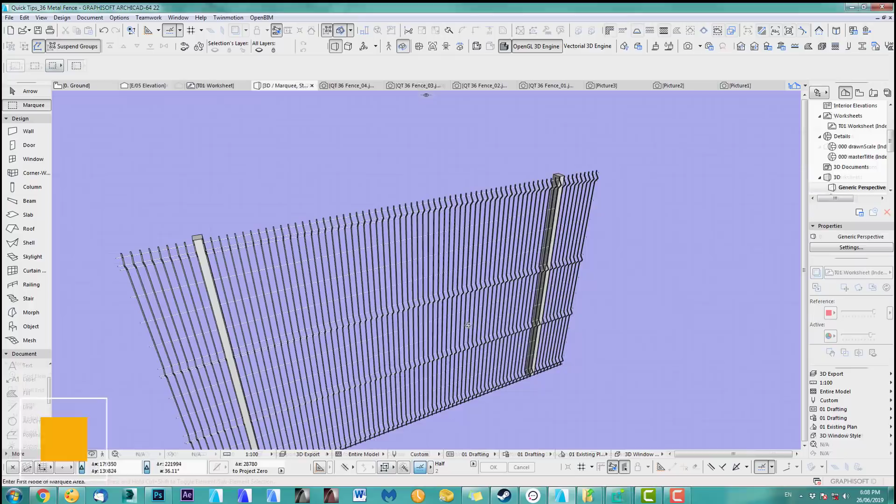I got this idea for this quick tip tutorial from one of my subscribers, Mark Simons. He asked me how to create some sort of wire fence, so I thought this would be a good quick tutorial. Let's get into it.

He had a fence on a PDF, so I moved it in here. Actually, I want to move it into my worksheet. This is my worksheet, it's empty, so I just move the PDF in here. You click outside and it will place it.

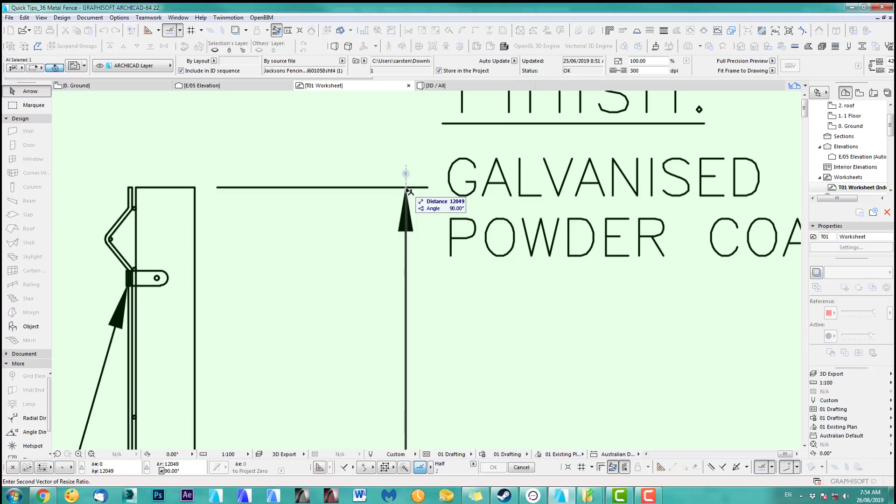Before I continue, I have to resize this. You click on the PDF and you can see it's 2410. So you go and resize, define graphically, to make it more exact. You go there and move all the way up here, use a shift key if you need to. Click again and put in 2410, enter. So this is nicely scaled down now.

Now the next bit is the exciting bit, which I didn't even know. I've used ARCHICAD so long and I can't believe I didn't know this. I saw this on a user group Facebook group a couple of days ago, and I need to try something.

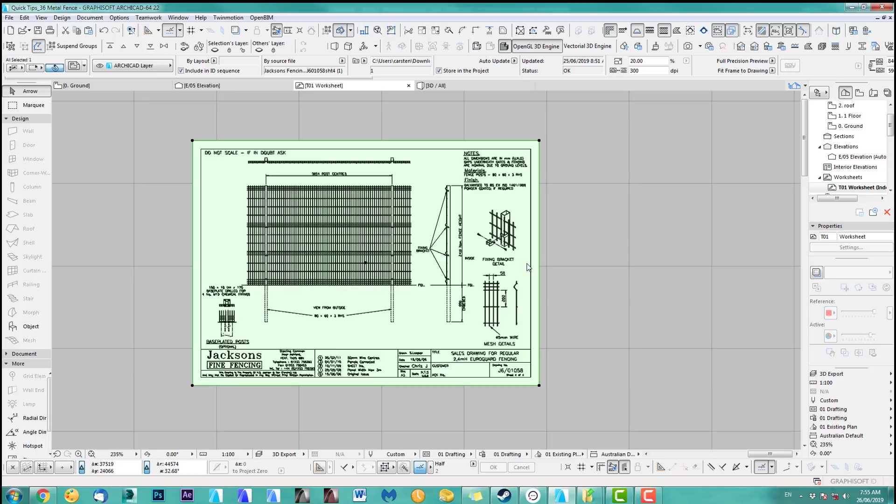So now you can actually select this PDF. You go to reshape and explode into current view. You get all those options here. I'll leave them at the default settings, but you can play around with it. And I click OK, and have a look what it did. So I can move the PDF away.

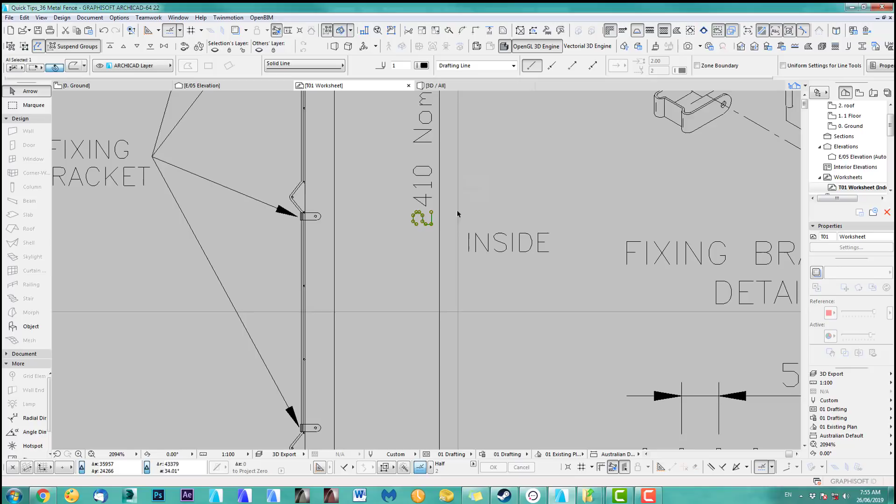And voila, look at this. I got everything grouped and their lines. Let's just suspend groups and see what we got. You got numbers there, you got lines, got some arrows. This is really good. It's a bit of a shame - I was hoping we'd maybe even get some of the font as text, but look, this is better than tracing along on the PDF itself.

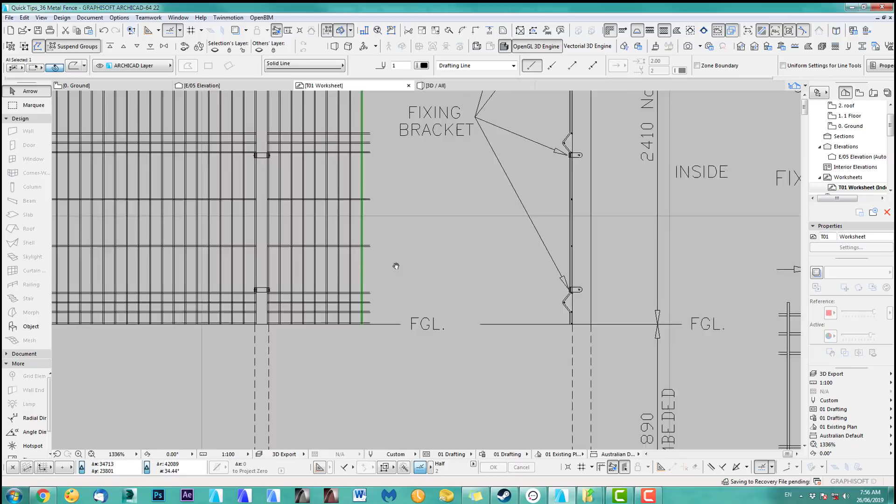So because you really do have lines - yeah, click here, this is even a polyline, perfect. So that was quite exciting to learn this. Great, so let's move on.

Okay, so you can do this with the new handrail tool that ARCHICAD has, but because it's a quick tip, it will take a little bit longer. So what I'm doing today is show you the first step to get this fence going, because even if you do it with the handrail tool, you still need the steps I show you today. So at the end of this tutorial, you will still get this fence. All right, let's get started. Next week, I'll show you how to keep going and use the handrail tool.

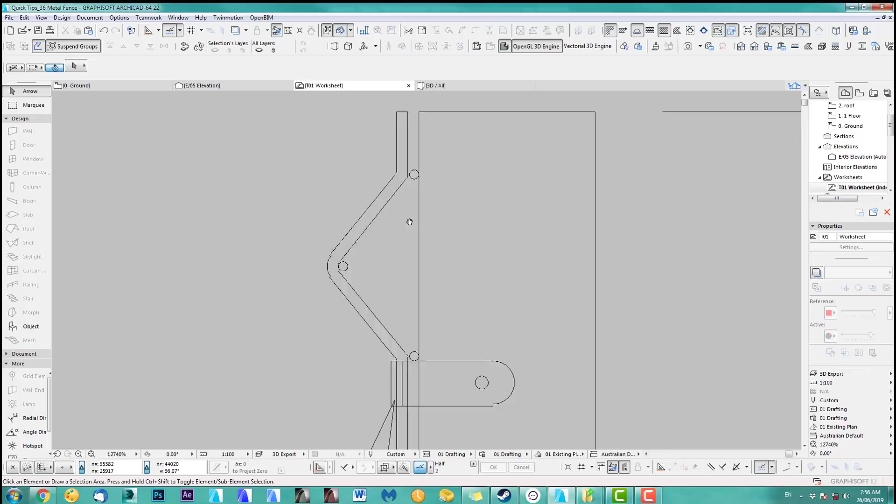We start doing a profile first. The first profile is I actually do some of those wires that go horizontal along. So I go in here and we just draw a fill there. I take a fill, let's make it about 50%, and you can obviously use your shift, use spacebar and click. So I have a quick look here - see, that's 4, that's actually quite good. Depending on the magic wand setting, as always, I have a quick look at what I've got here.

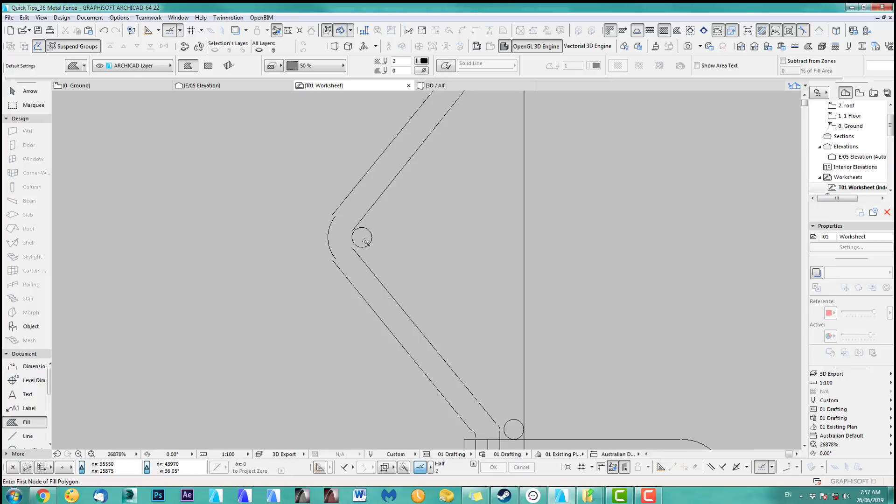There you go, so you work around it, but this works fine. I could now click in here and keep going, but for me this is easier - you select this and you just keep duplicating them. See, so you go there, and you can hold shift now to go down. Very simple, let me just do this quicker.

All right, the last one. Hit escape now - as soon as you hit escape, you see they're still selected, the ones I just duplicated. And this is great because I want to group them. Yeah, last one too, so all you do is you group them. So next time you select them, you can just click on one fill circle and you got it.

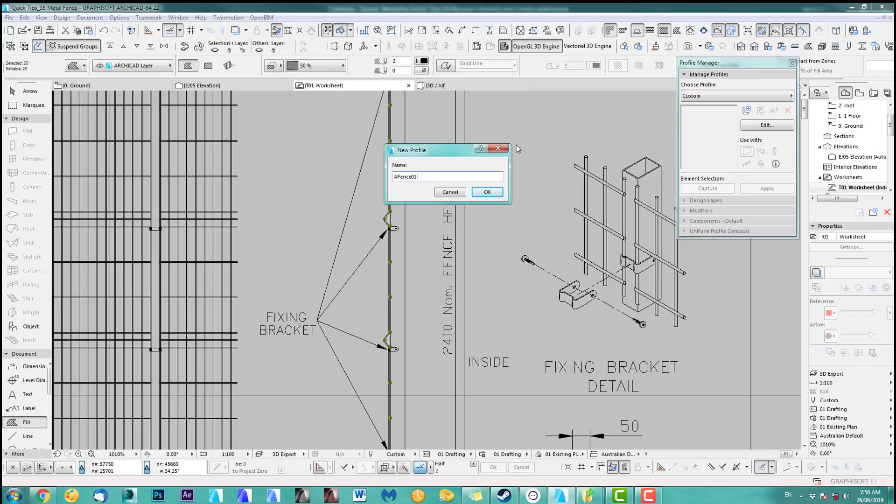So I copy this now and I create my first profile, which we got new. And as always in my tutorials, I put an A in front, so it goes to the top of the list for me. So we call this A fence 01. Very simple. Okay, we paste this in here.

There we go. And I go over here. And for now, I paste this there, because what I want to do is just save this for now. I want to go back to my worksheet and have a quick look where this is placed.

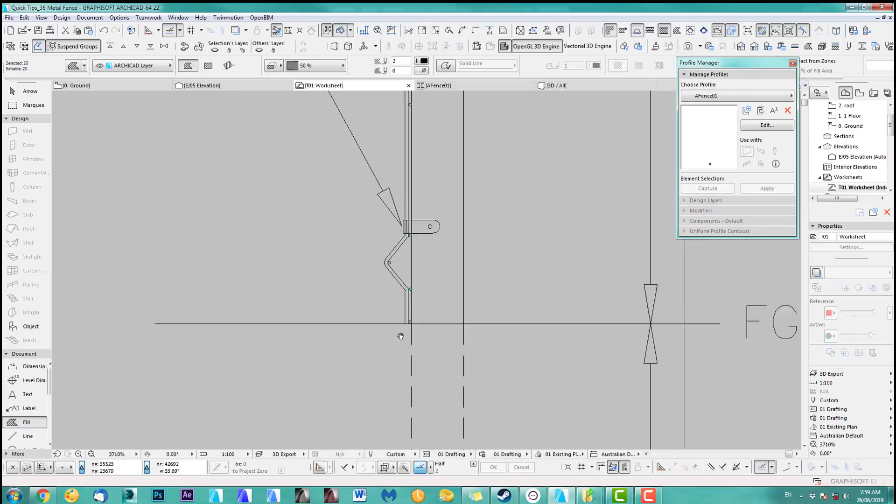Yeah, this is slightly above, so you can do the same. Just hit M and we measure. Well, it's 1 millimeter, but let's just do the same here, might as well. So we edit, select everything, right? We go there and drag, and say Y1+, so it's above ground a little bit.

Now make sure when you select all the fills, you've got to override the surface. I'll just put, I'm going for metal aluminium, that'll do. And we save this.

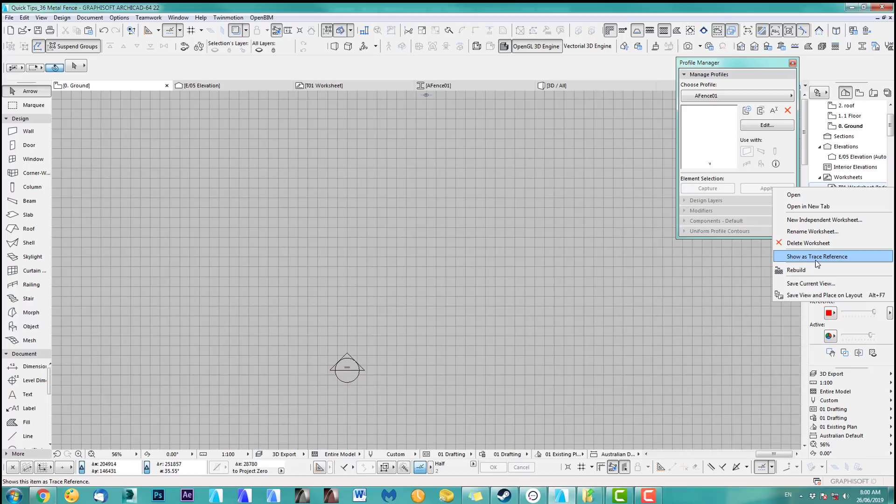Okay, so let's go back down here, and now to show my worksheet, I just click there and right click and show as reference. There we go. Okay, so I got my first part, which are the round ones horizontal. So you can now draw this with a wall.

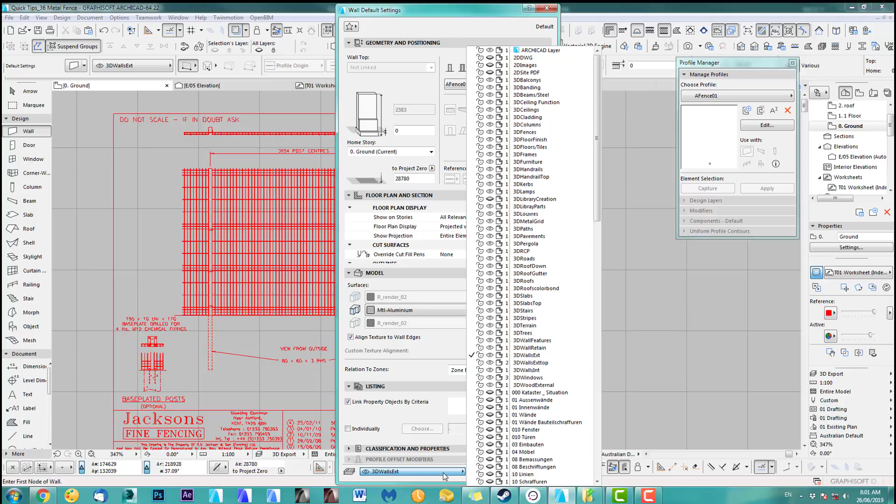So go in here and we obviously go to fence. Make sure you do the same material here, which we had aluminium, and let's just put this on. Yeah, you know, for me, I don't have a fence in here, I think, so I put this on handrail for now. All right, great.

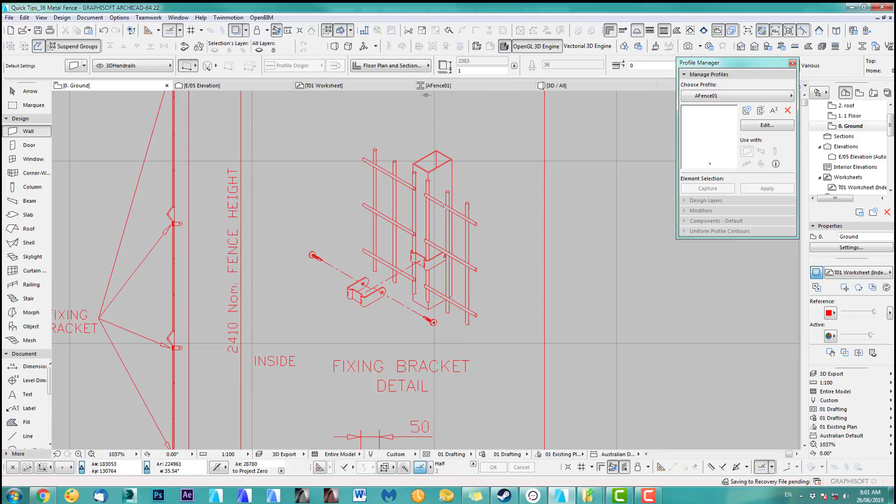So let's just start doing this in between the post. Okay, so have a quick look. We maybe go back to our, well, I can see it in here in 3D. You see it just stops at the post. So we start from the post here. We click here and we draw this along all the way to here for now.

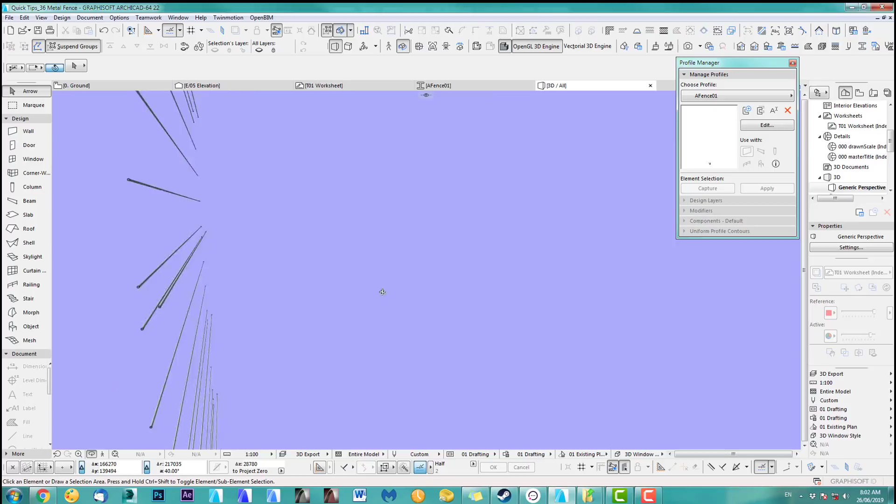Okay, let's see what we got so far. If we have a look in 3D and I move a bit closer, there you go. Yeah, perfect, perfect, perfect. So I do this next one after.

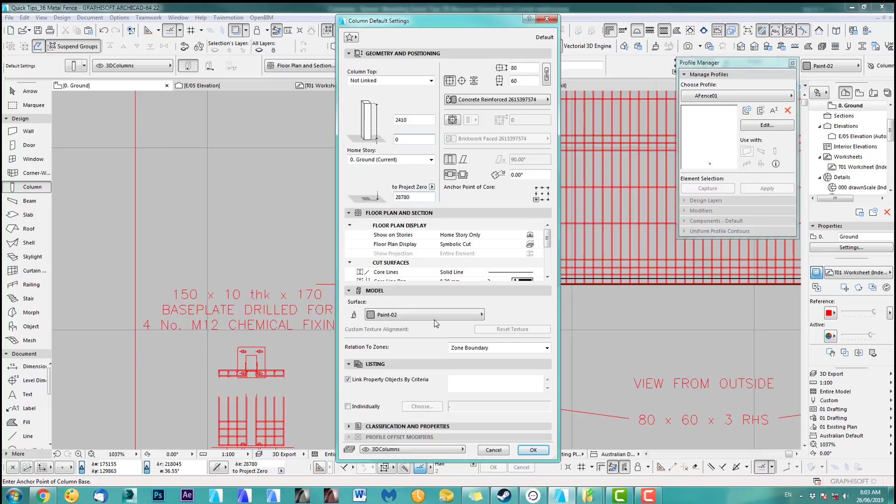I like to first add my post here, which according to this is 80 by 60. So we go and add a column for this. Take that off, we do 80 by 60. The height, I will have to look into more, but let's put it to 2410. That's how much I can remember. And we do this for now.

For this part, we just do the same. It's a metal aluminium fence, and we keep it on handrail because I want everything on the same layer. And you can see the insert point. Let's move it over here. So now we can click there.

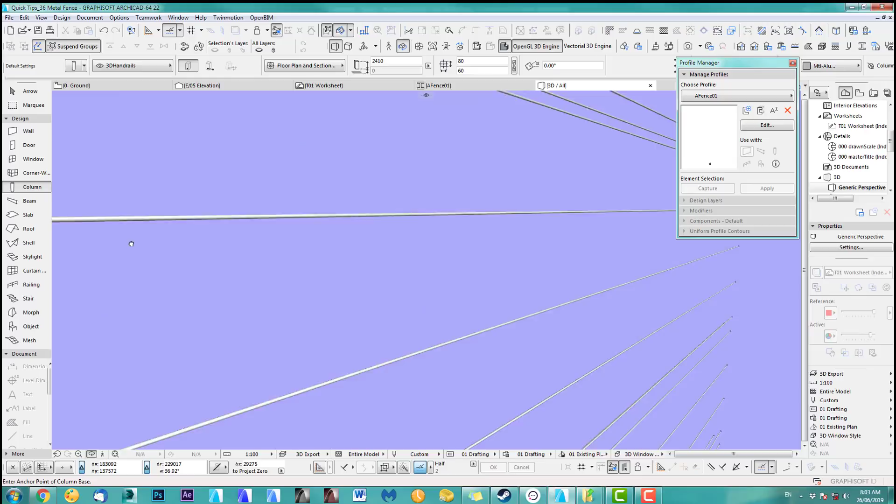Okay. Right, let's have a look. So we got 3D here, and we move over. What we got? Yeah, that's all right. I can see actually that you can see the horizontal lines.

I need to swap them over. This has to be swapped. There you go. And I probably have to move it back, but for now, let's just leave it there. See, now it's sticking out perfectly.

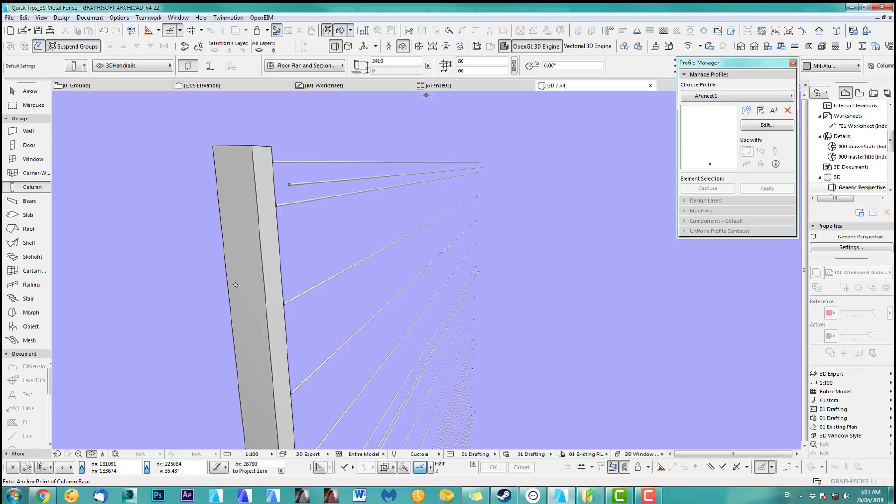All right, let's take one of those and move it over here. Actually, you know what? I might have to draw this according to Mark's drawing. We move this there. Okay, so I'll just copy another one and we move it all the way over here.

Yeah, Mark, anything you haven't drawn exactly right, this will come out in this tutorial. Gotta draw carefully here. This should be the same, shouldn't it? Sorry about that. Okay, so great.

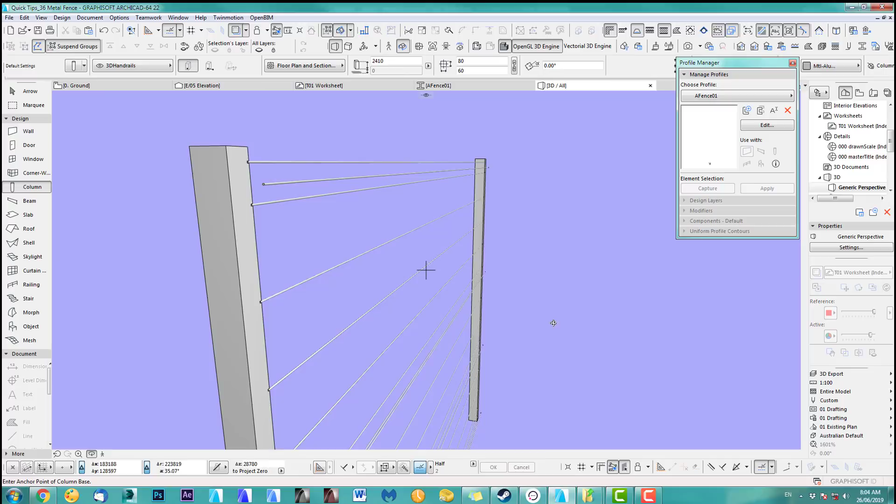Now we obviously want to do the vertical ones. We got two options on this. The very first option is we use again the profiler. I'll show you this quickly. So we go fence, we got this, and I want to duplicate this, and I call it fence 0101, fine by me, and we open this.

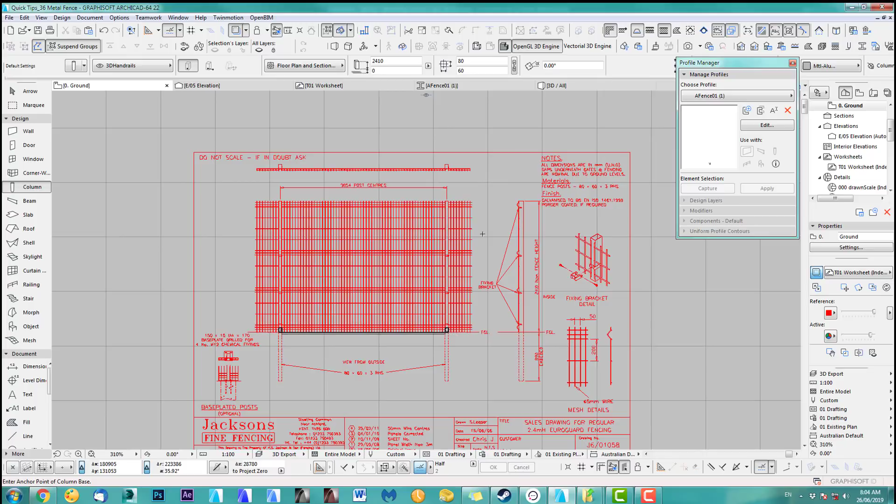Okay, actually, before I do this, I need to trace now along here. Yeah, a bit unlucky, I can see with the PDF. The PDF didn't quite do this correctly, unfortunately. So, oops, let's go up to my worksheet.

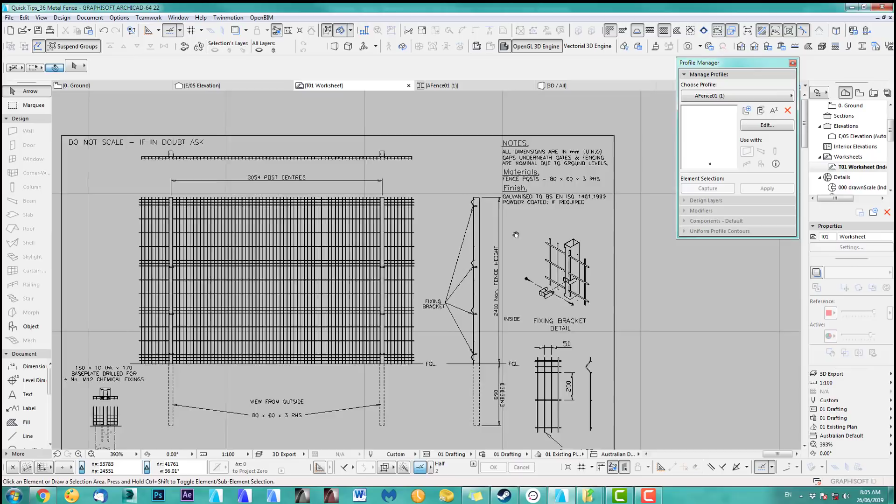I'm not disappointed, I still think it's very useful. Yeah, it's obviously not done perfectly.

But that's okay. So what I do now, in this case, we take the polygon and just draw along it. But instead of a polygon, I actually like to draw a wall.

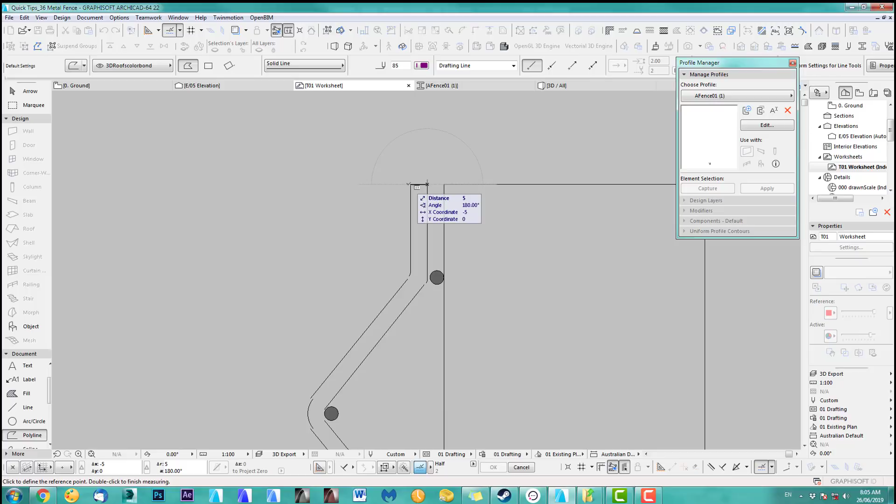I've shown this before, so let's measure this quickly. We go from here to here, so that's 5. Let's go back to our 2D drawing, because I'd rather draw a wall, and I'll show you in a moment why. The height isn't important, let's just make it 5 millimeters thick.

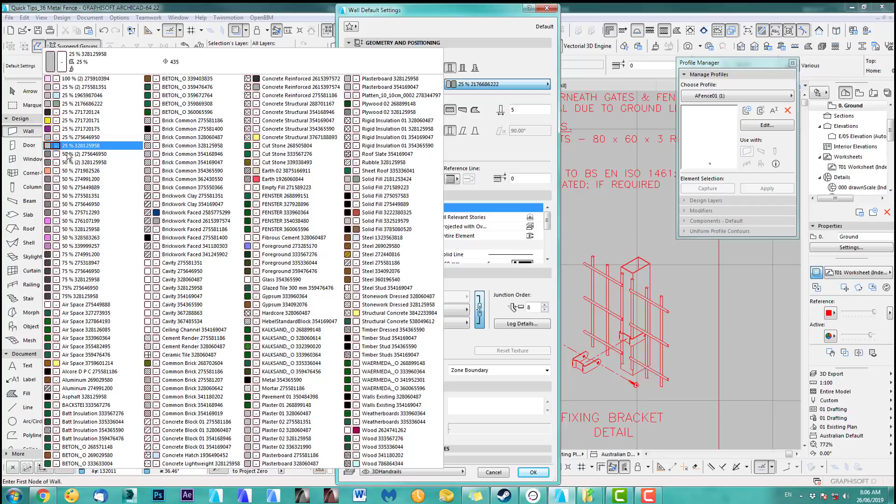This doesn't matter much, but I'll explain in a moment. Let's just do it a bit more, maybe 50-50-50. Again, you'll see it doesn't matter much, as long as we've got a feel for it. And I put this on an ARCHICAD layer for this purpose.

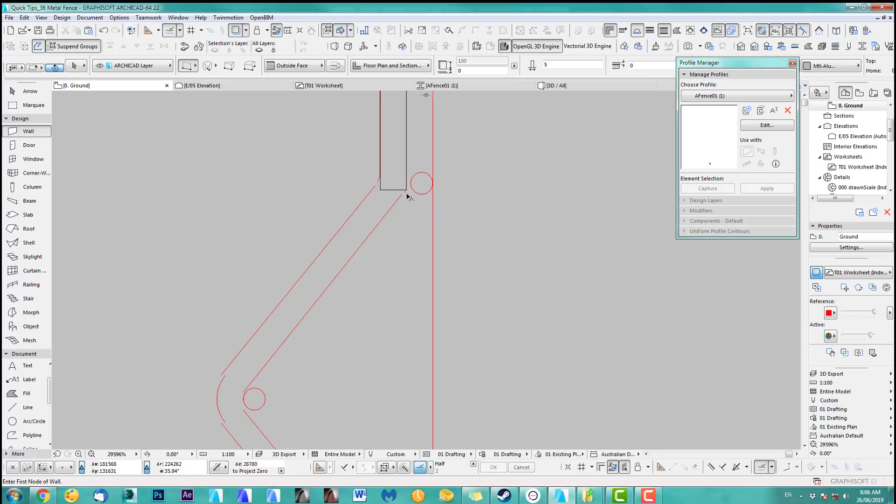Alright, let's draw the outside face. Let's see where we start up here. Now obviously this won't be round here, but for this purpose it'll be fine. Alright, so we go there and I just trace along here now.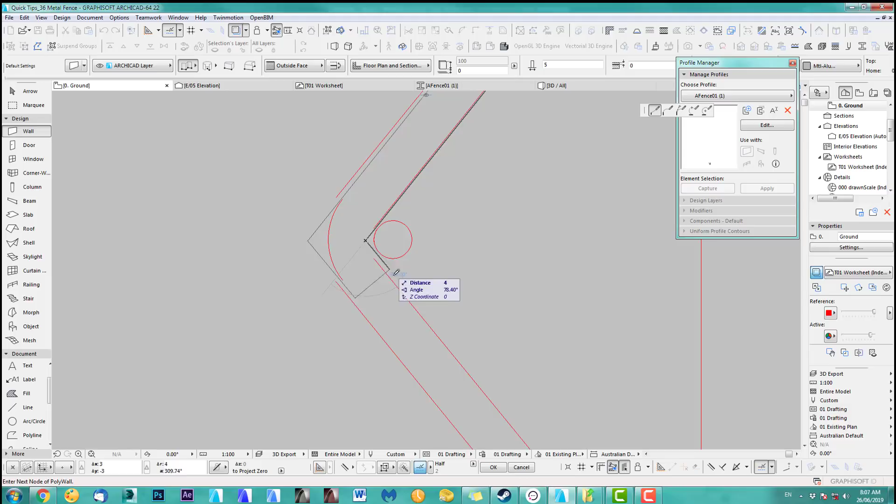If you need the exact angle, just click here, parallel to this. There you go. Okay, let me just continue and finish this off down here.

Alright, select this. Suspend groups, this is it. And yeah, I know you can't see a fill really, but I do have a fill in there. Let's just move this a bit out here.

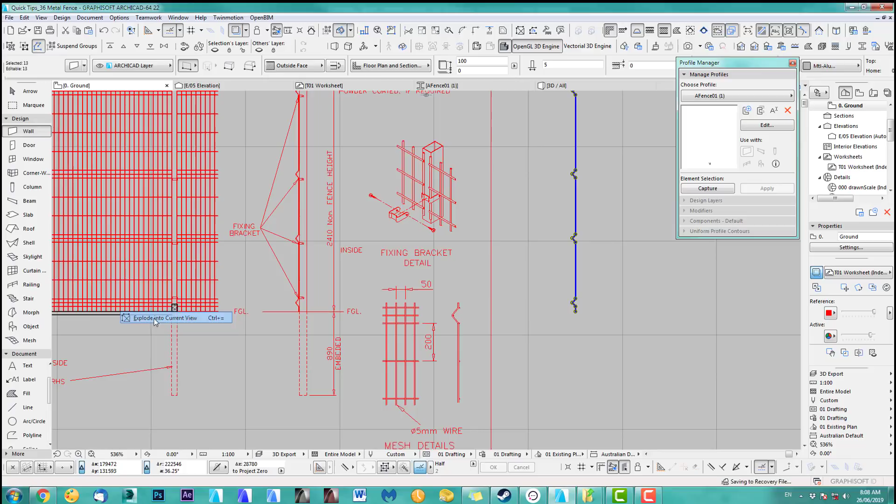And now we just do the same as before. We reshape and explode this. There we go. No, I don't need the original, but you can keep it if you want.

And we draw a marquee around here, and go to the fill down here. We select all and copy this, then go to the fence here and duplicate this fence, calling it fence 011. That's fine. Edit, and we'll just paste this in here.

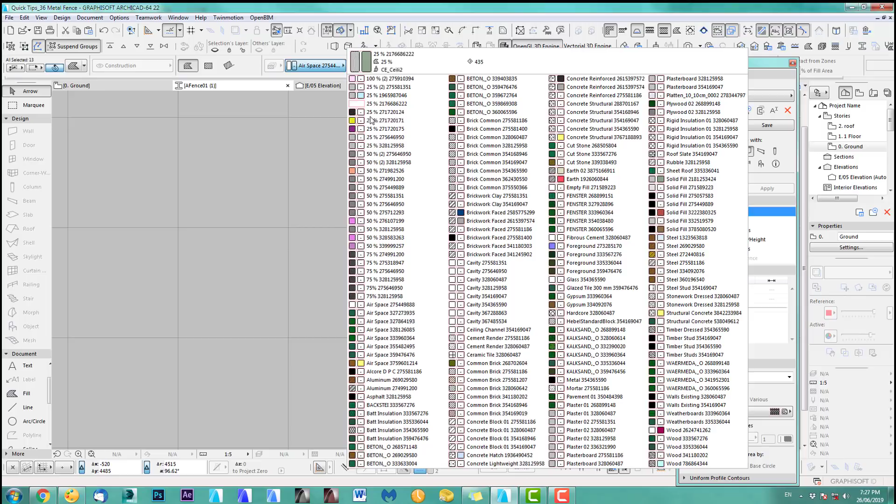Alright, let's go and have a look. I know it's not much visible at the moment, but we do have our fill there. See? So let's go out here and apply a different fill so we can see something. There we go, okay, great.

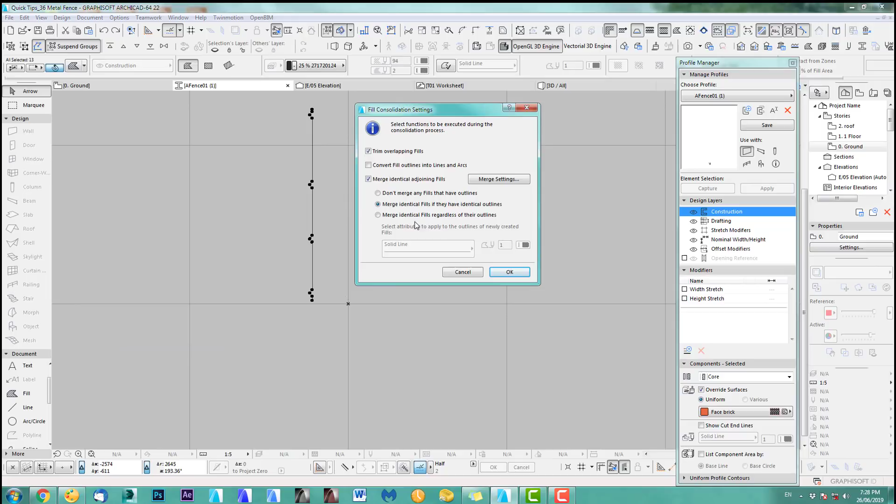Let's make sure - yeah, they're just pieces at the moment. So let's group this. Actually, what we can do is go here, reshape and fill consolidation, default settings, okay, now it's one fill, perfect.

So we drag this down. Yeah, let's go there, don't need those ones anymore. So we can select this one and then shift, go all the way down, and it will deselect your main fill here, getting rid of those ones.

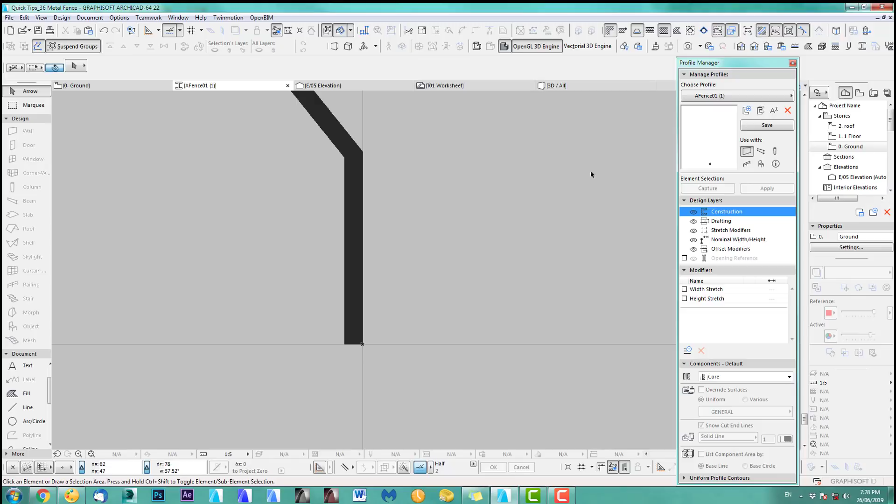Okay, what we can do is move this a bit, because if you look in our worksheet, we can see how much here. Let's have a quick look - you zoom in and hit M, it's from the middle, 15. So we go back in here, edit, we select, and drag this X15 minus.

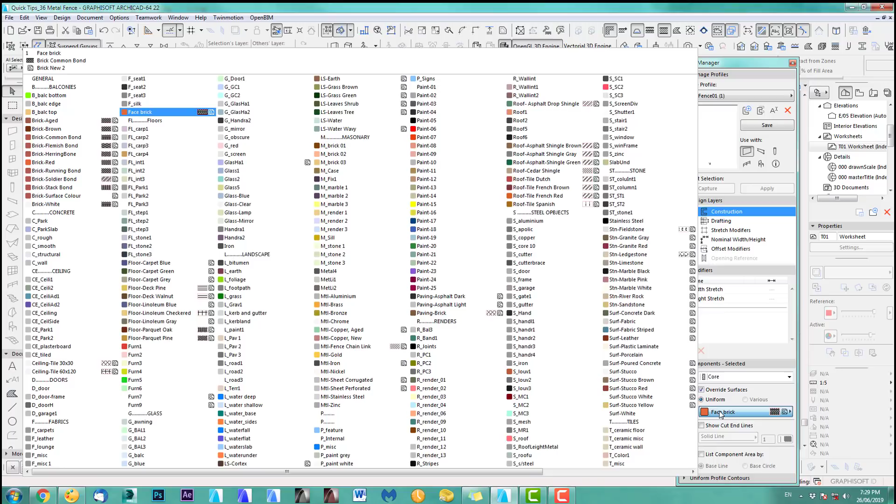Alright, we do the same for the aluminum material and save this. Okay, let's close this for now.

Okay, let's draw those vertical wires. So we open the wall tool and this time go and choose fence 01. Put this on our handrails - if you need to, just put it on a different layer, but yeah, let's do this. You never know, it could be handy.

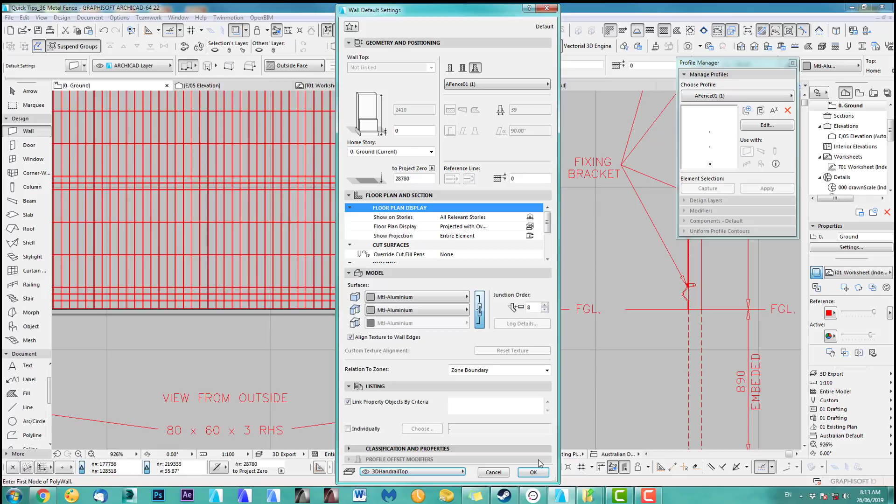And we go okay, and draw one in here. Let's just draw one here, let's draw it over here. Okay, I always have to have a look in 3D first - let's see what we got here. Oops, I got my marquee tool, which doesn't help because I've got nothing around there.

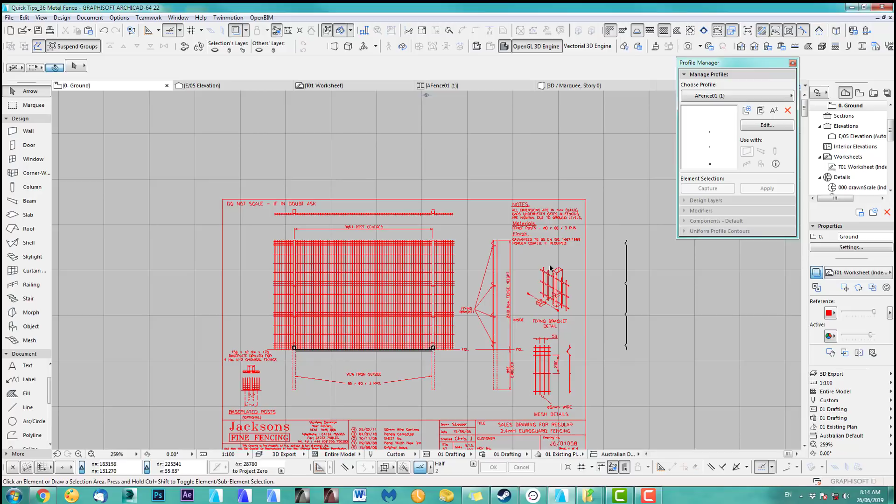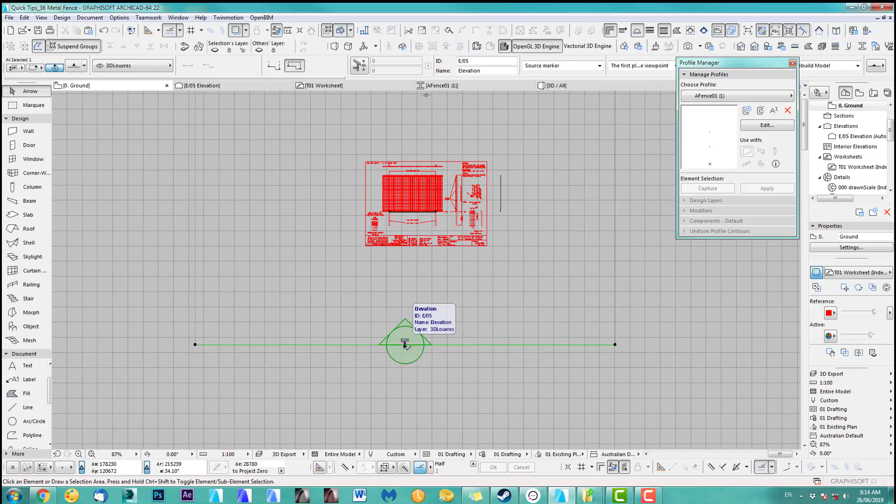Okay, so as you can see, this is our first one here. Yeah, cool, great. Now, to match this, I've got an elevation here, so let's rotate that elevation because... alright, let's see what we got here.

Okay, I have to move this here, otherwise I can't see this one. All right, what have we got? That is better.

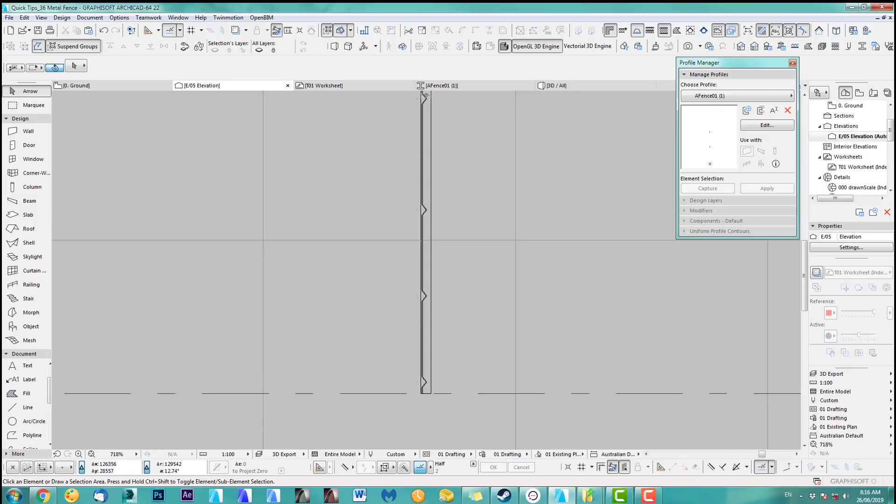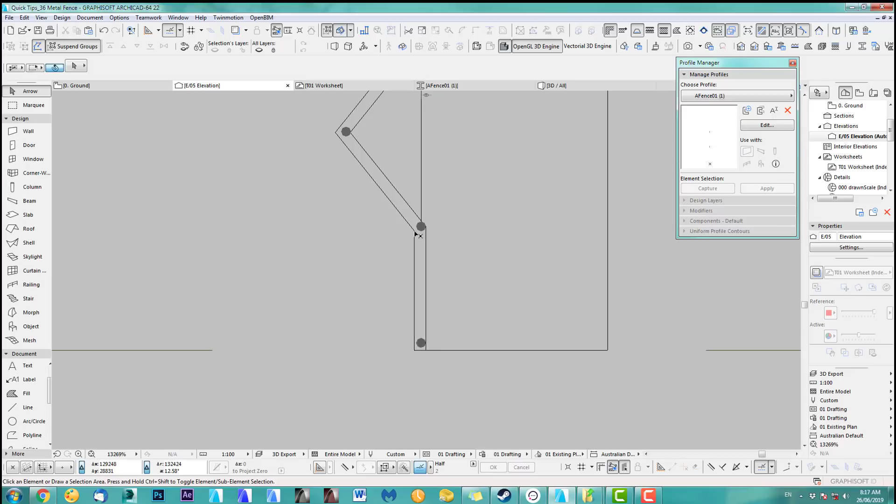You can see this one's the wrong way around, so select this and we just rotate it. Actually, sorry, mirror it - mirror is easier. So you mirror this over, and let's have a look at the elevation again. There you go, and then you can drag this into the middle there.

Now you maybe noticed the roundness of this. ARCHICAD does this because of, I'm not sure, it's in the program. This is very small. To get more of those, what you would have to do is go into... let's go here. Okay, I'll show you.

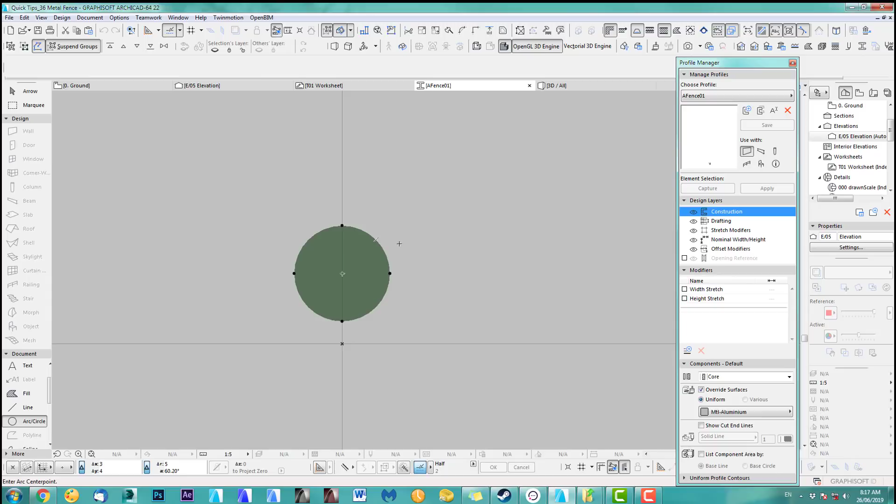Select this - even though they're selected, they look round. I'll show you what I mean. Let's just draw another arc, because I don't think I've got arcs in here anymore. No, I deleted them. So I'll do a new arc. I'll delete this, and now pick this one again as we did before.

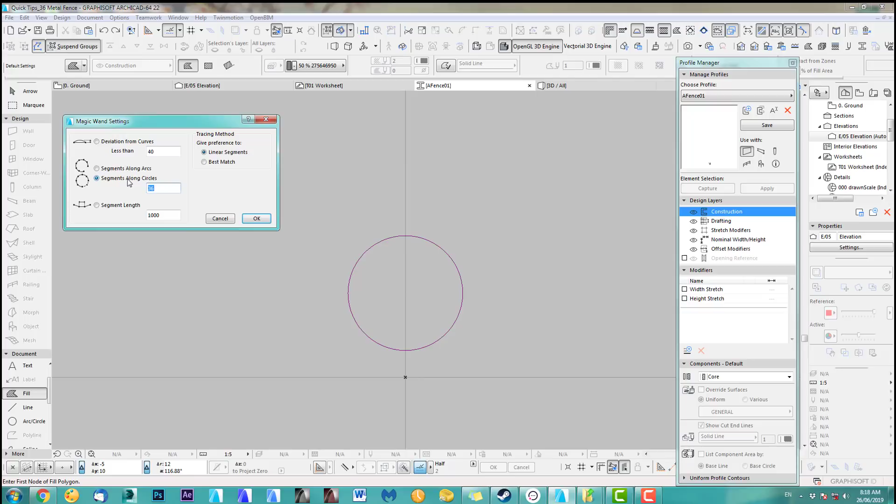If I do the space click again, see, it's only 2 this time even. So what you can do is go to the magic wand tool and tell it linear segments, and let's just set segments along circles to 36. So if I do space click now, you get lots of those.

I've only done one now. Let's just save and have a look if that helps - sometimes it does, sometimes it doesn't. So if I go into my elevation now, yeah, see, it's much more round. Have a look, you see the difference? So that's all it is.

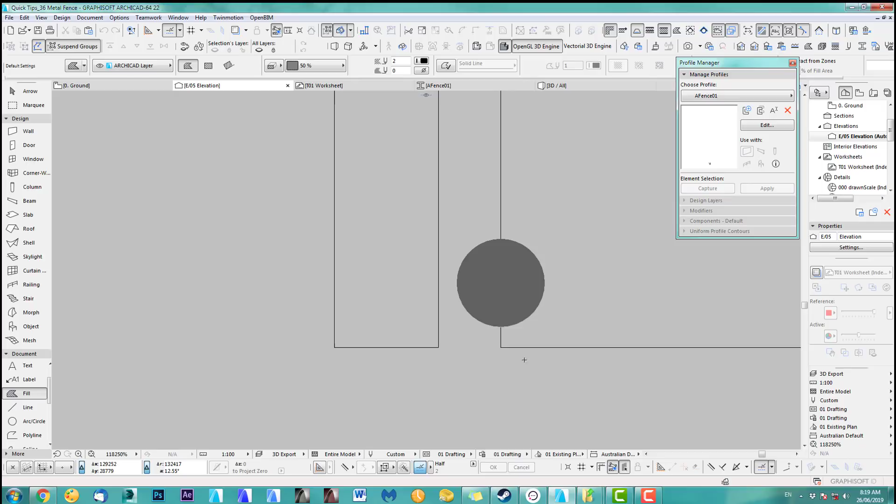So obviously, if you like it rounder, you just do this. If you come across this, that's another little quick tip within a quick tip. That's pretty good - you got 2 today because that PDF exploding was pretty cool. Okay, so where are we at? Sorry about that, bit off track.

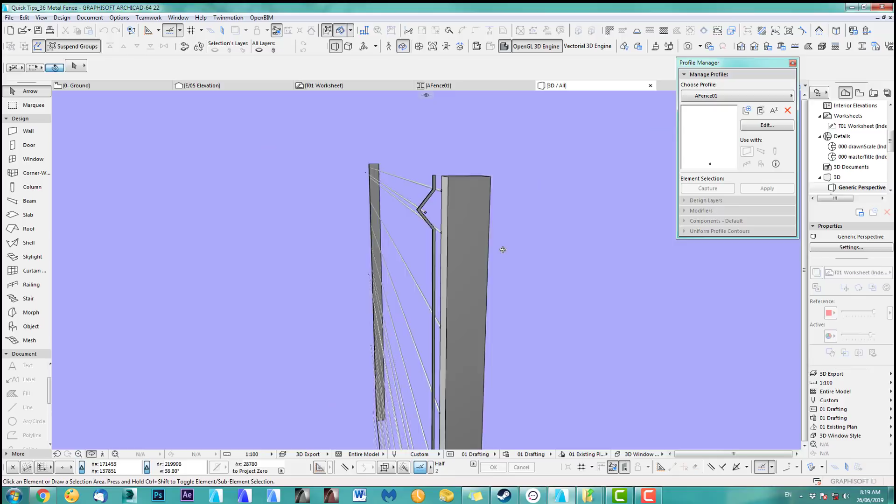So we got this, and let's have a look in 3D now. Yeah, and we are here. All right, looking good. So obviously now we got this, and you just go along and spread them out.

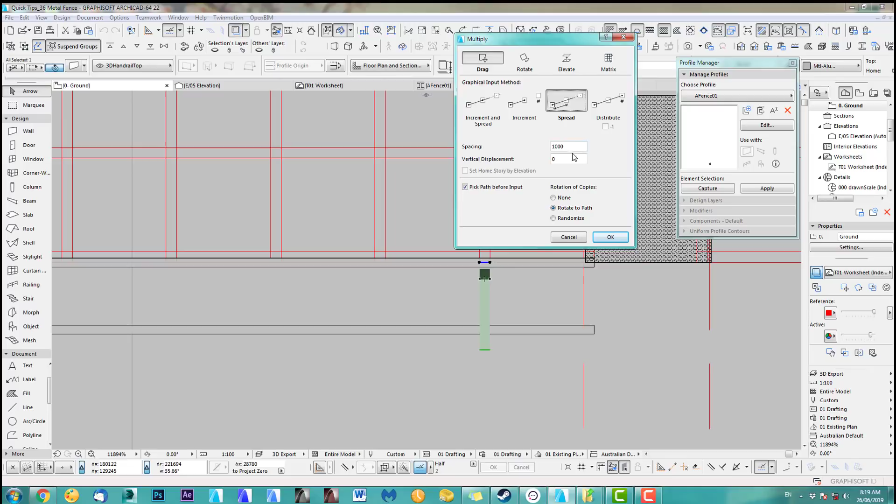You can measure - just hit M and let's measure. We got from here to here, 50. So we just go like this and spread them out by 50. It's the easiest way to do it, don't need pick a path - we click anywhere really because it will just go by 50.

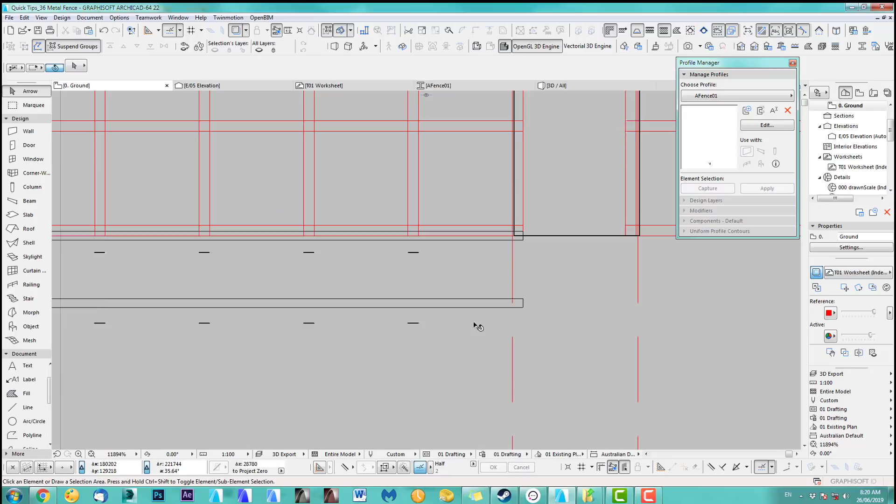Okay, one more - perfect. Again, what I usually do is I like to group those, just in case I need to select them all together. Group, great. Now this group is still suspended because I really need one more, so you drag one more and put them there. This is not grouped yet, so before I do this, just copy another one.

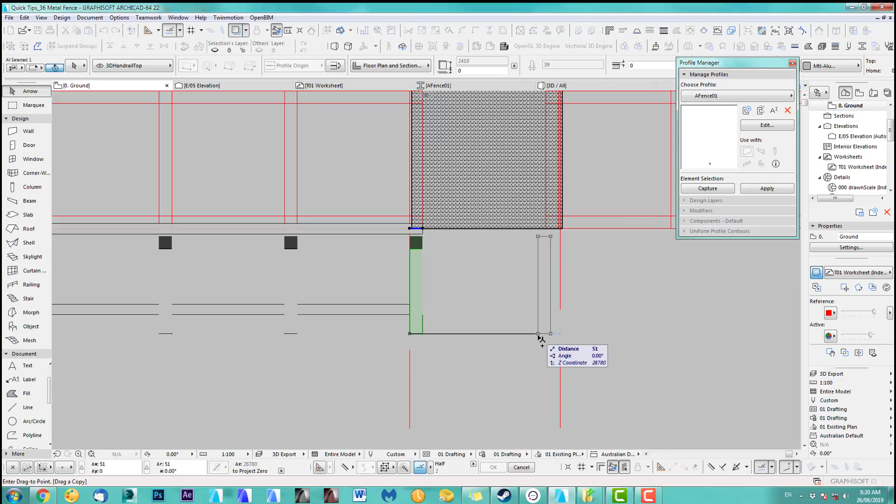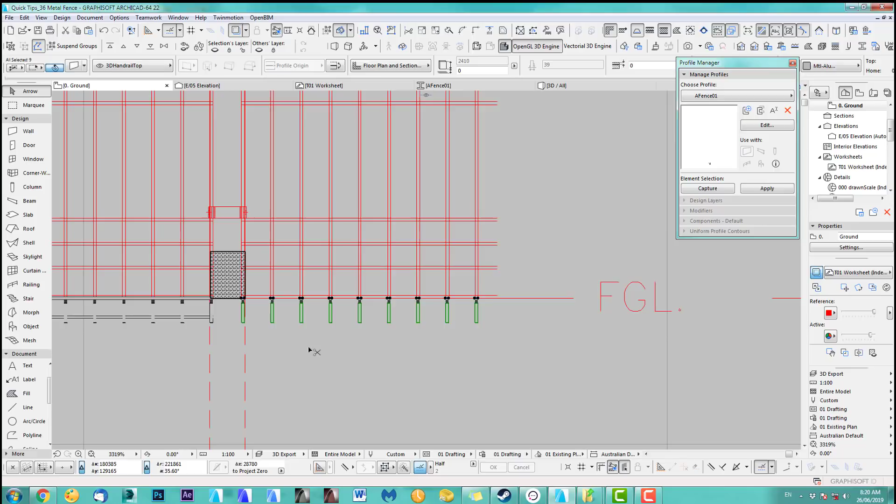And we go here. All right, now I can group this - see, there you go, take this and group. Now they all group, and you can just continue and do it again, going this way. Perfect, and we group this, then let's just drag a copy over the other side.

Let's have a look in 3D - starting to look pretty good, I think. Okay, as you can see, we need some more horizontal lines. All you do is space click, and we draw another line out here, and let's do the same over there.

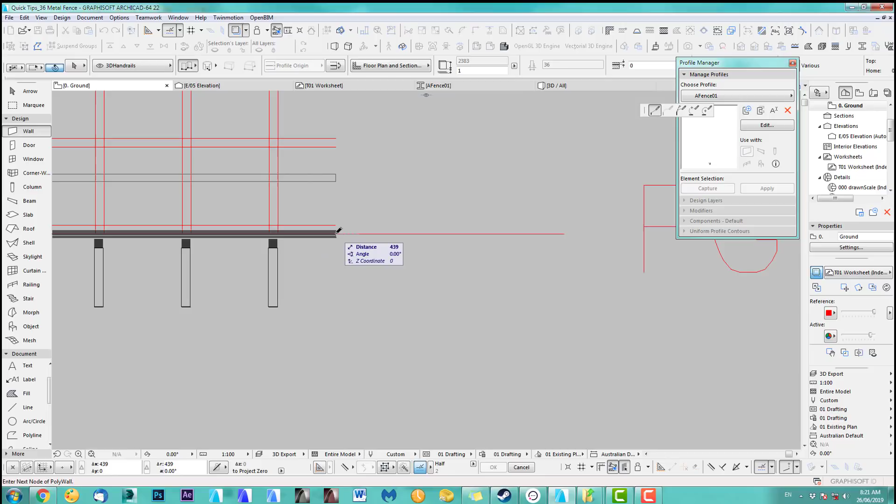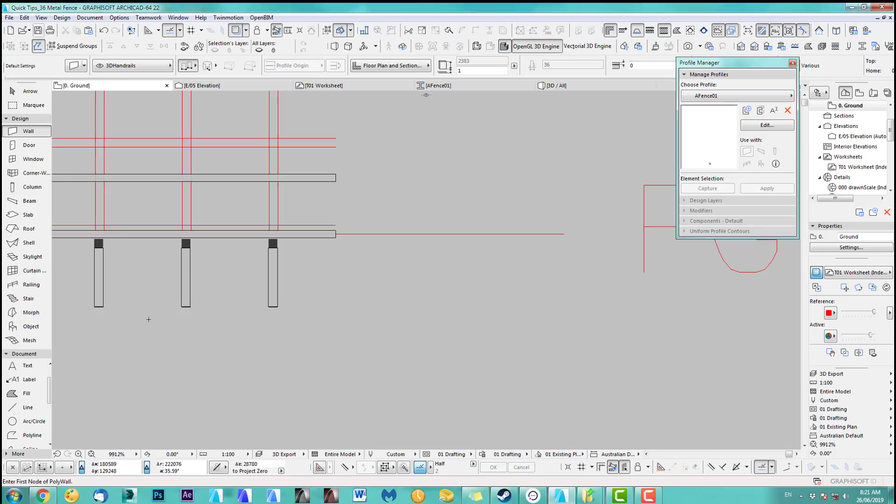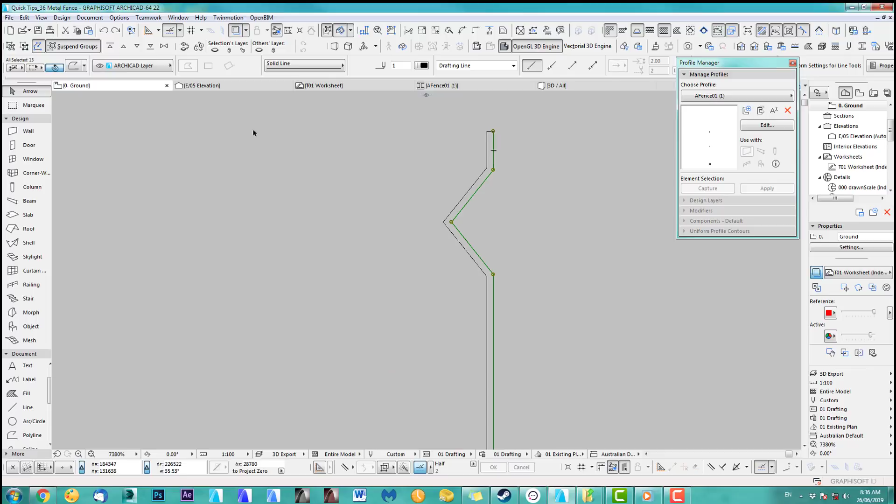To make this vertical wire a bit more round, what we do is go back to our lines and fills here, suspend groups, and I just want to select the lines on one side.

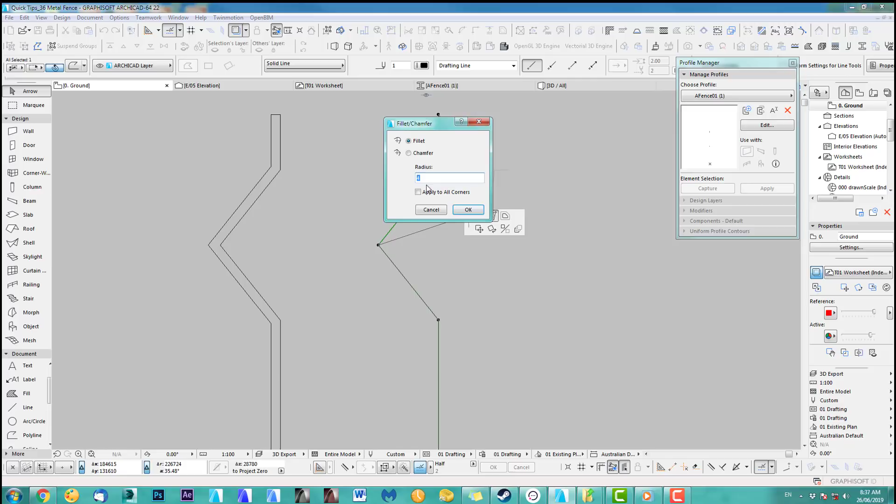Okay, so the next bit is you'd like to reshape again, because I want to unify them. Unify - that means now if I click, see, they are now one polyline. Let's make a copy just to explain this better, because now we can do the same as before: go in here, apply to all corners, set it to 4, and it just looks a bit more round.

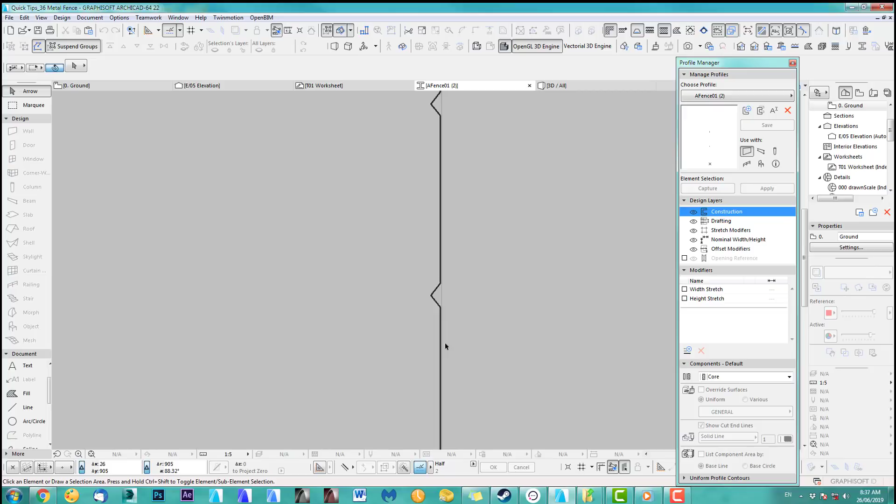Okay, the next bit is how it's just a line. So how do I go about getting this into 3D and round? What we can do is duplicate this, and edit. Let's go to the bottom, it's easy where the origin is. I need to draw a circle here, and to do this I want to go in the middle here. There we go, click and click again. Okay, let's draw this, or move it over here.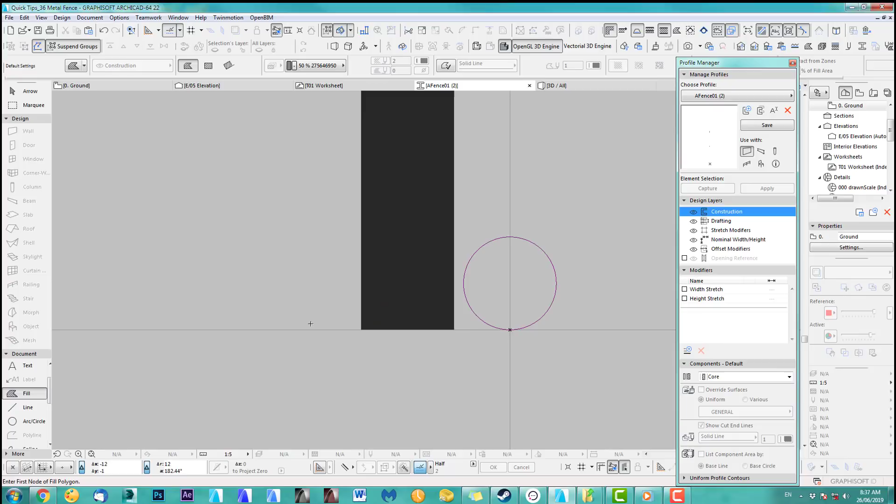Now the fill, we can select all the fills, and actually now first get this one, delete, and then we space click. And remember, because I had 36, this is quite nice and round now.

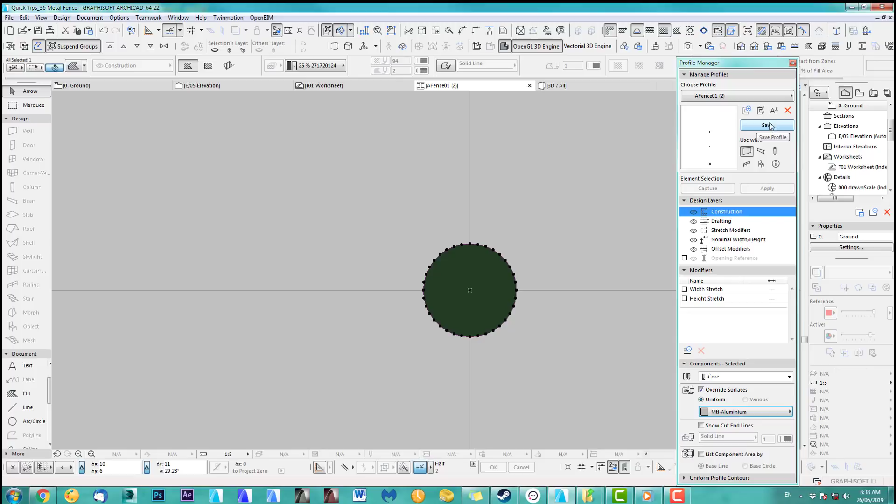Okay, I should have really put this into the middle of the origin. You will see in a moment why. Alright, so this is good. Again, select, and we do our aluminium. There we go, and you just save this. And before you do this, I will use this as a beam. Alright, save. Great, so let's go back here.

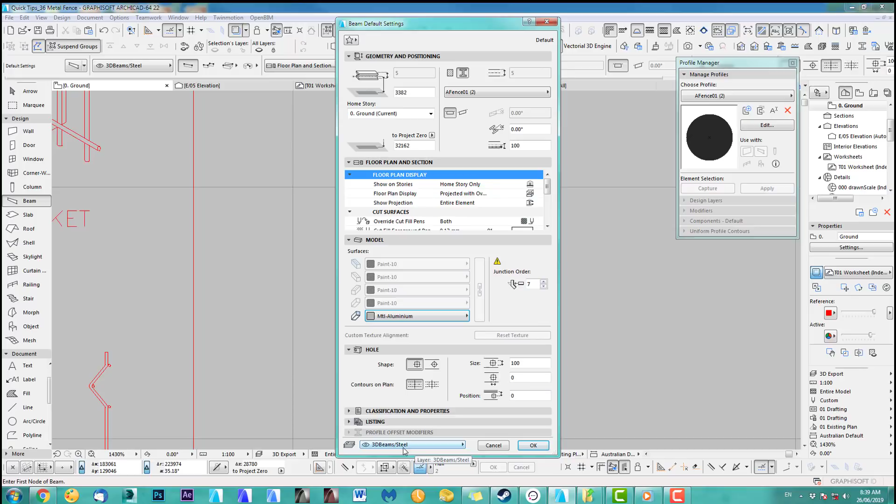So what I like to do is draw a beam along here. Right, let's open the beam tool, and we pick our pencil tool down here again, put this on aluminium. Let's leave it on this layer, and we hit OK. So now use your space bar. Let's move in a bit.

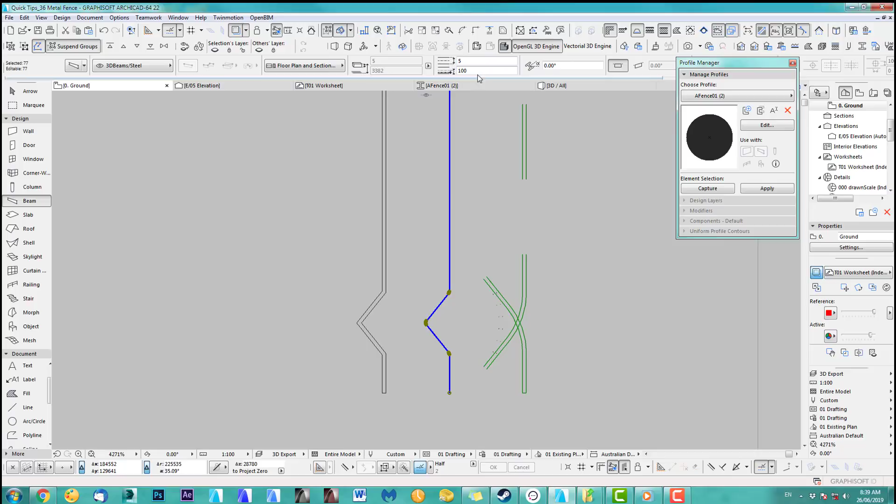All right, not to worry, I'll show you what happened. Select all the beams. I should have been very careful before in the settings. Okay, let's open this way, it's probably easier for you to see. Reference axis, I want a 0 in this one. There you go. Okay, so now this beam should be fine.

Let's have a look in 3D. It's looking pretty good. Right, let's get back here.

Okay, because we can't rotate beams in elevation, I need to convert this to a morph now. So you just right click and convert to a morph. There we go. It's still grouped, yeah it is. Okay, so let's drag this over here.

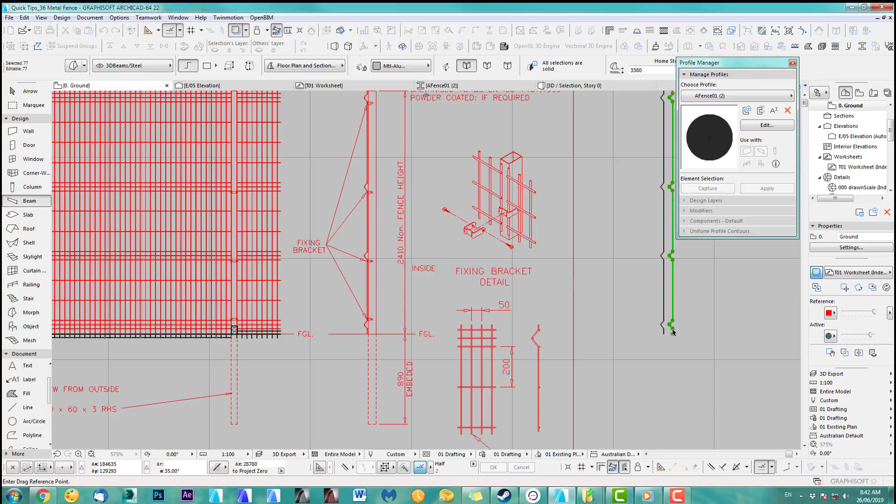Got my elevation here, let's just drag it there, and we go, and just let me think, we gotta go and drag it. No, we don't need to drag, it's all good. So elevation, this should pop up somewhere here.

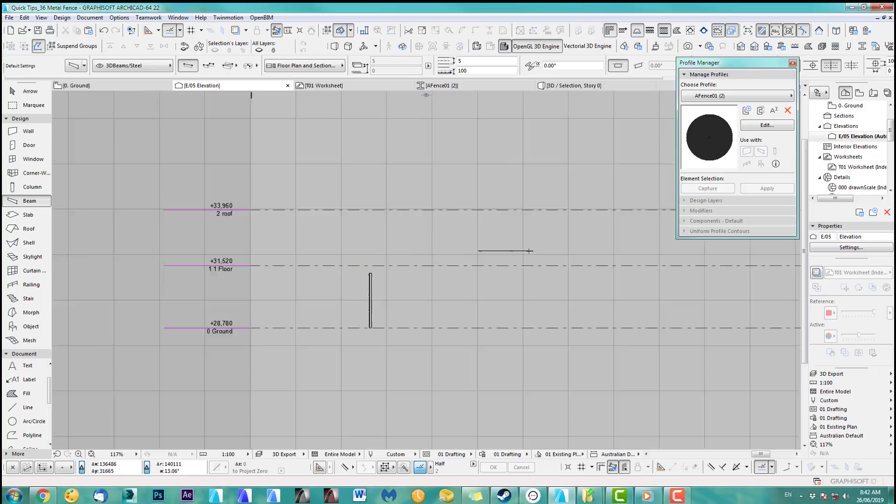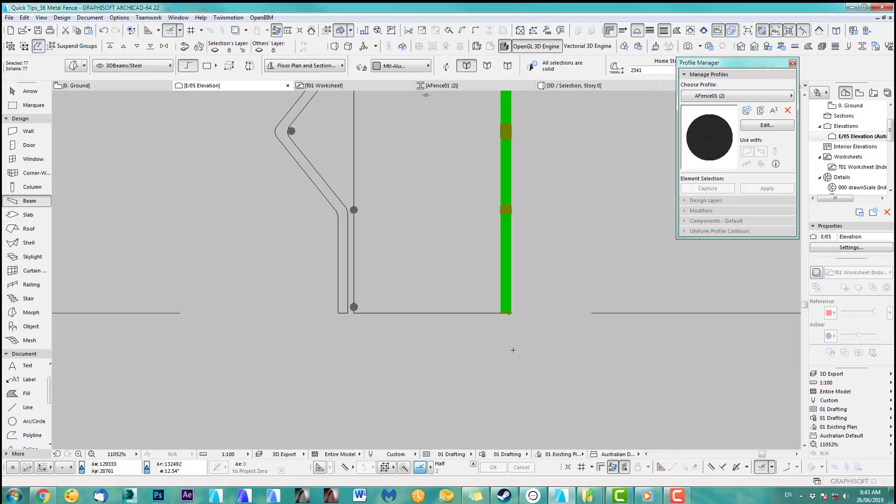There we go, perfect. And what you do is we obviously now rotate our morph element, and we drag this down. There, and we drag this to there.

Okay, let's see if I can find this again. So, you know what, it's easy, just go morph here, select all morphs. Oh, there it is, beautiful. All right, that's good. So, yeah, select the morph and we now rotate.

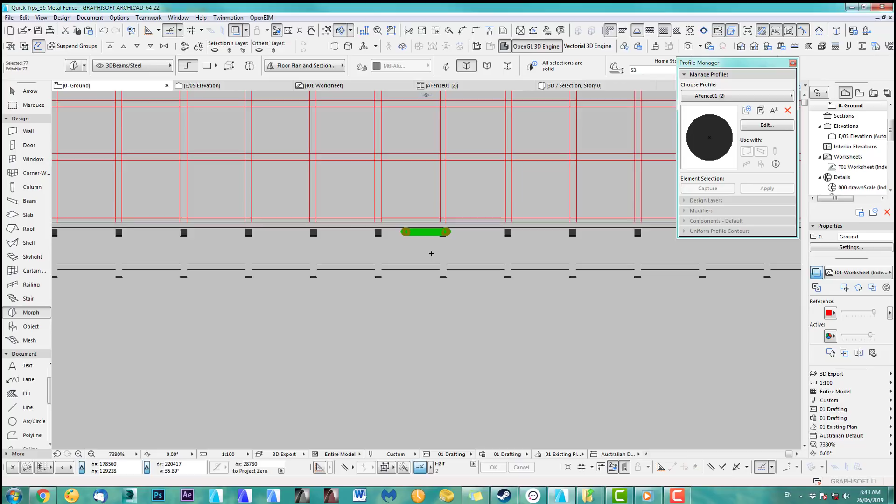And let's move it over here. And let's see, first you can see already the morph, they can get slow. So look, this is an option. If you really want to do something really nice, maybe get a close-up of a fence and visualize it, render it up, then this is good. But I'll be honest with you, if you're not close enough, I'd rather do just the edgy fence because you just don't see the difference, okay?

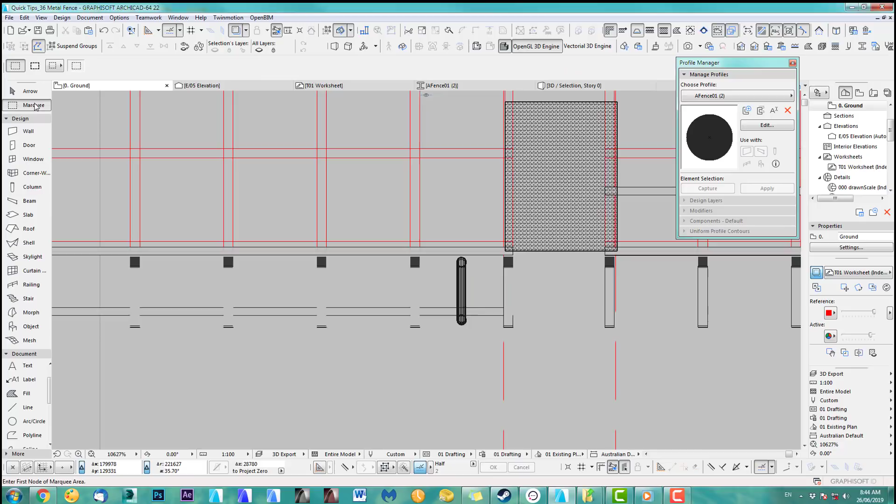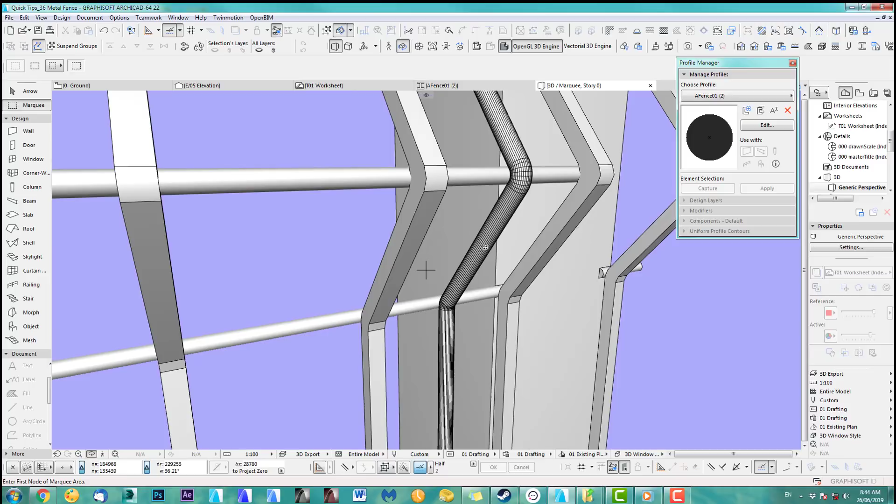Anyway, so let's see, let's move this into a marquee frame and see where we're at. There we go, and you can see a couple of things. Obviously I'm moving slowly. Yes, it's nice and round, but you have lots of lines. Okay, so it depends. If you do like an elevation, you will see all those lines and it will look pretty dark, you see what I mean? So this has advantages and disadvantages.

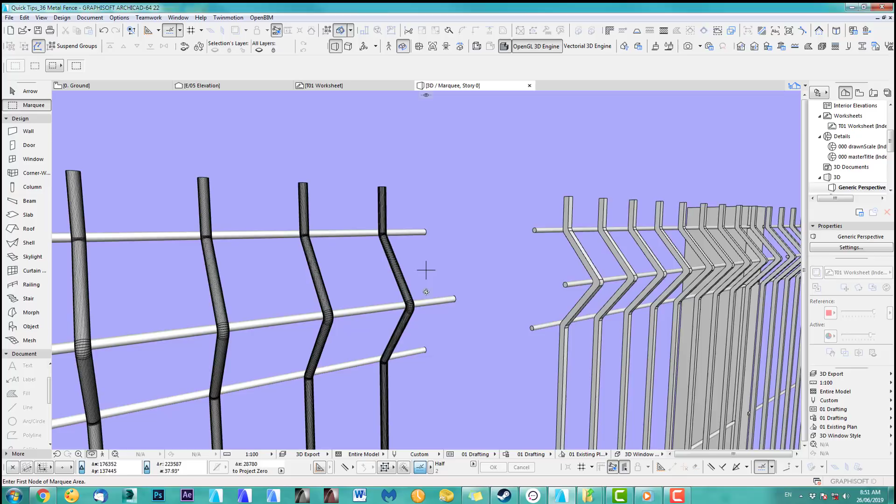But yes, if you go have a close-up and you render this up, this will look really nice and round. Okay, to show you what I mean, the difference, let's go. I got some fences here in 3D. You see, obviously that's a bit more edgy and that's nice and round. So if you render this up now, you can clearly see that obviously the round fence looks much better in your 3D image.

So that's what you have to think about it. Okay, otherwise do both. For your construction drawings, do this, and then just do the round one for a nice 3D image. Put them on different layers. Problem solved.